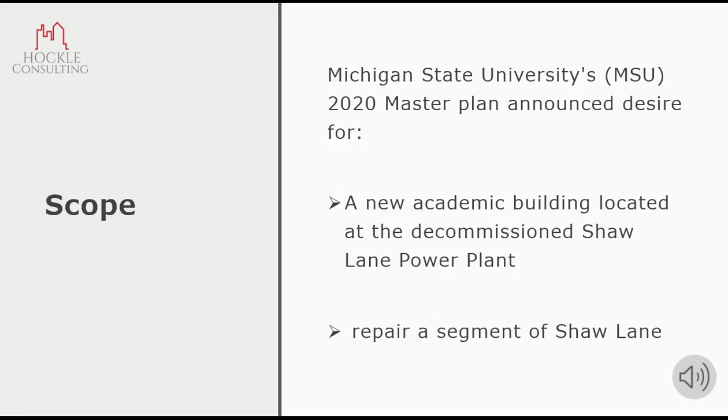This facility would ultimately become a central hub on campus, so coupled with the construction changes in the area, a segment of Shaw Lane would need to be repaired, and also the traffic would need to be rerouted differently in that area.

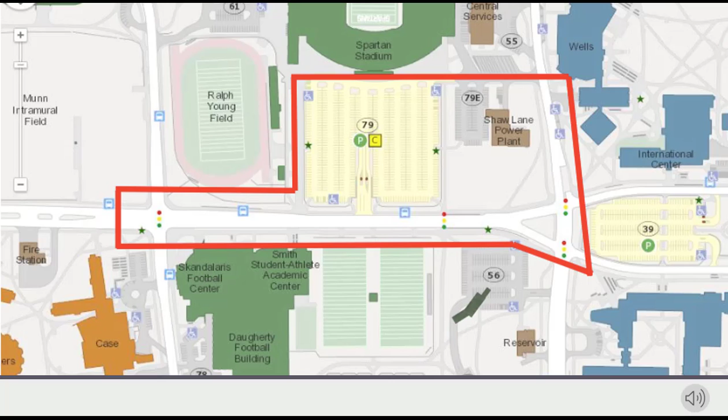Here we can see an aerial view of the proposed site area. The segment that is going to be repaired is perpendicular to Chestnut Road and Red Cedar Road. In this segment of the map, we focus in on the decommissioned Shaw Lane Power Plant. This will be the location of the proposed STEM building.

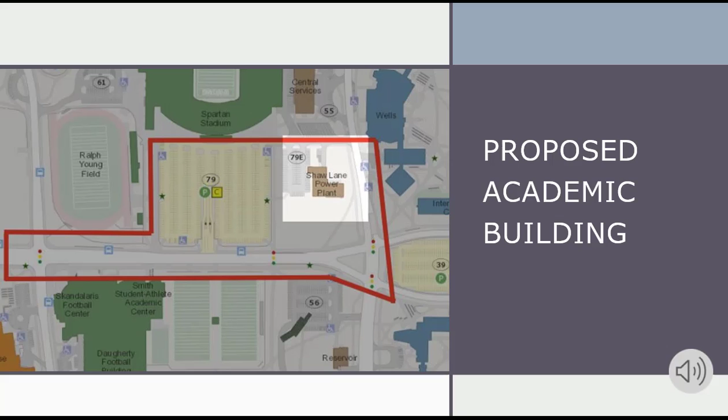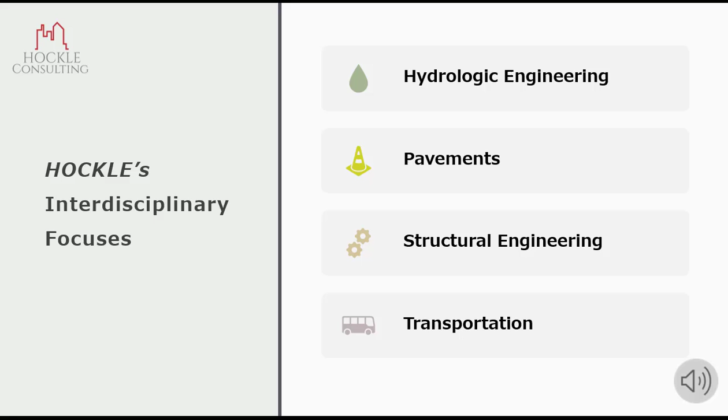At HOCKLE, we use several interdisciplinary fields to accomplish the scope of projects we take on. Each further addresses field-specific goals. We do not have an environmental engineer on our team, but all environmental information has been contracted to other firms that MSU has hired. Nonetheless, we still work to incorporate environmental sustainability in all aspects of our work.

Next, I would like to discuss some of the discipline-specific areas we focused on. Our objective in the hydrology area was to create a stormwater management system that could accommodate the new academic STEM building. Adjacent to the site area, there's also the Red Cedar River, so we wanted to minimize the impacts to that concerning the effluent leaving the piping networks. We also wanted to determine the most cost-effective way to do this and abide by Ingham County Drain Commissioner regulations.

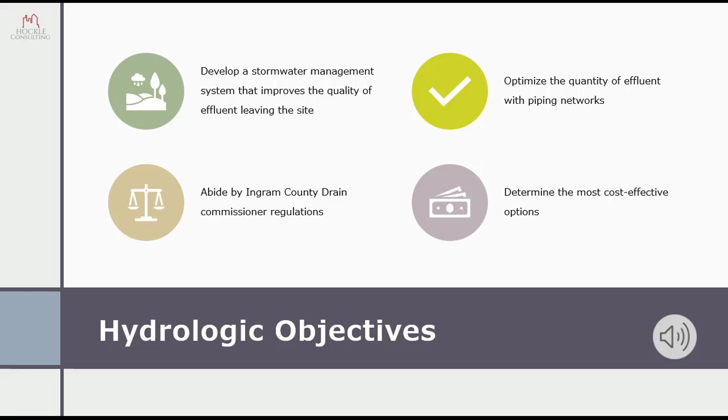In order to combat adverse effects to the Red Cedar River, the HOCKLE team designed their stormwater management system to actually decrease the flow rate into the river. We also implemented several other strategies to help improve water quality of the runoff entering the stormwater management system, which we will discuss later.

Concerning the structural objectives of this project, we needed to take into consideration the different types of loads that the building would encounter. This could be live loads from the increase in students and faculty due to the different resources and opportunities the new building will offer, dead loads from fixed objects like machinery and lab equipment, different loads from different types of rooms, and also weather loads like snow and wind.

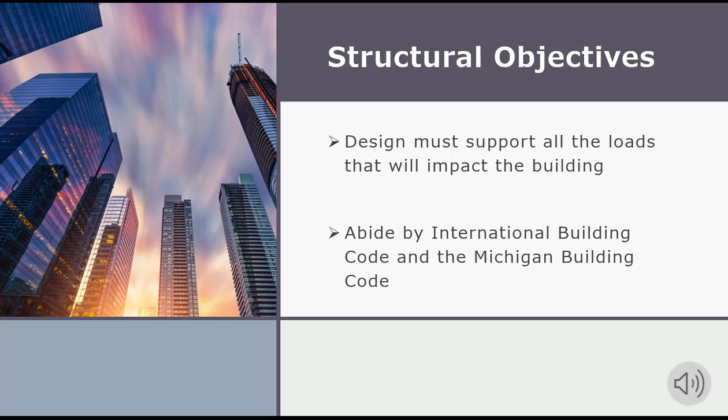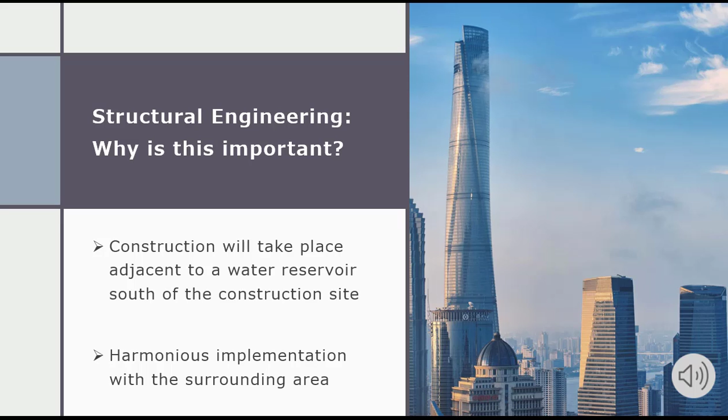The development of the academic building has many interdisciplinary considerations with hydrology due to the Red Cedar River water reservoir. So with that, there are economic considerations, safety, sustainability, and environmental consciousness to make sure that the building is harmonious with the surrounding area.

Our transportation objectives involve being able to provide a reasonable level of service on Shaw Lane. We also wanted to maintain parking accessibility. Because North Shaw Lane is going to be completely closed and only accessible to pedestrians, all of the traffic will be rerouted through South Shaw Lane.

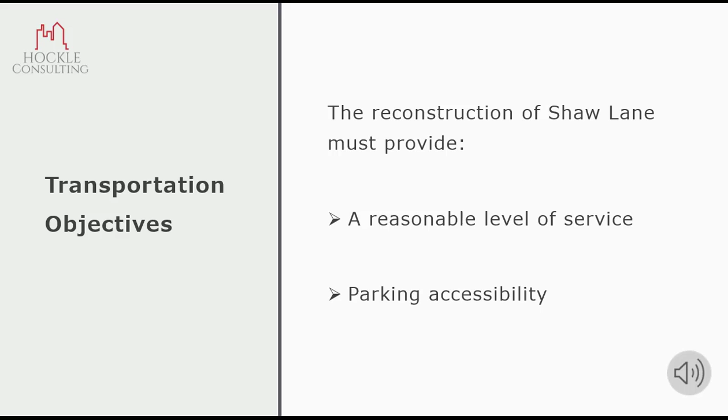Level of service is based on a grading scale of A through F, and they have different speed designations based on the type of road. Examples include freeways and one-way streets. These transportation considerations are important because the current design only accounts for traffic for a certain level of service that may not accommodate future activity.

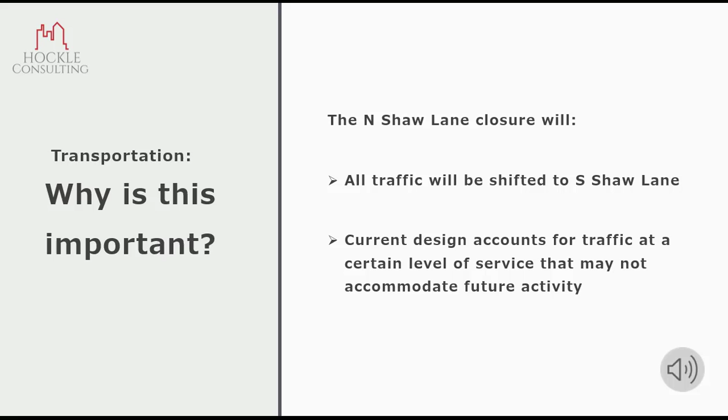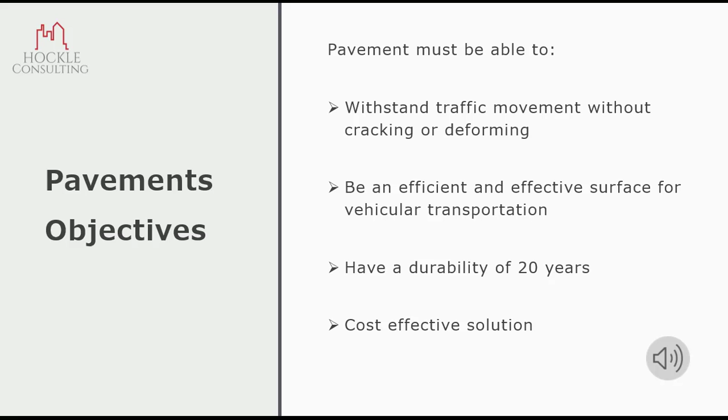Our pavement objectives have many interdisciplinary considerations with transportation engineering. First, we want our pavement to be able to withstand traffic movement without deforming or cracking. Also, by Michigan Department of Transportation standards, it must have a durability of at least 20 years. We also want our alternative to be cost effective.

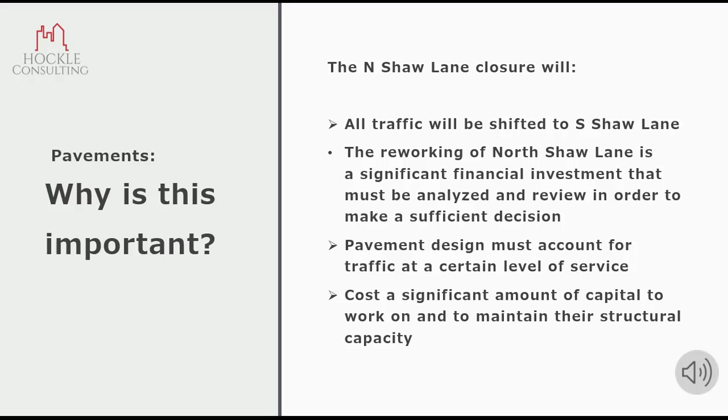Our pavement considerations are important for many of the same reasons as our transportation engineering considerations. Regardless, pavement must be able to accommodate future activity. The reworking of North Shaw Lane is a significant financial investment for the university, and the pavement design must account for that certain level of service that will be experienced.

Moving forward, we will now hear from each of our consultants to describe the design process of each discipline. Hello, my name is Evan Offerly, and I am the lead hydrology engineer here at HOCKLE.

The new proposed academic building on Shaw Lane will require an entirely new stormwater management system that not only manages and reduces the amount of runoff from the project site, but also increases the water quality. The solutions to these problems involve the installation of a green roof on the new building, the creation of 6 new rain gardens, and the construction of a new underground storage tank.

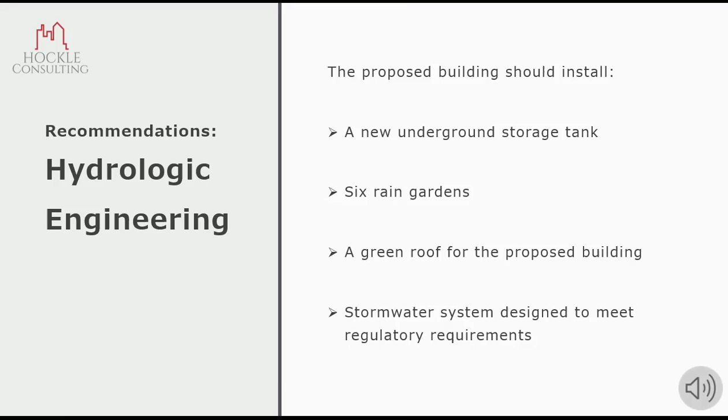The implementation of these technologies will not only help meet, but they will help exceed laws and regulations set forth by the Ingham County Drain Commissioner. These regulations involve limiting the amount of runoff leaving the project site to 0.15 CFS per acre. This equates to roughly about 2.3 CFS for the entire project site.

The Commissioner also requires that a detention tank must be able to accommodate a 100-year, 24-hour storm while still meeting the maximum 0.15 CFS per acre of runoff constraint. To account for the instance where there might be consecutive storm events, the system must also be able to drain itself within 24 to 48 hours.

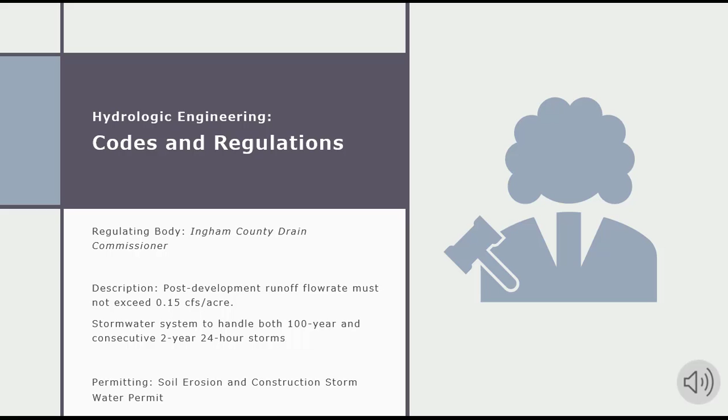After talking with the structural engineer Alex, we decided to implement a green roof. The green roof would act as a retainer of water that would slowly release it, ultimately increasing water quality and decreasing runoff. This green roof is designed to be 300 square feet in size and 3 inches thick. The building structure was designed to be able to support both the live and dead loads of this design.

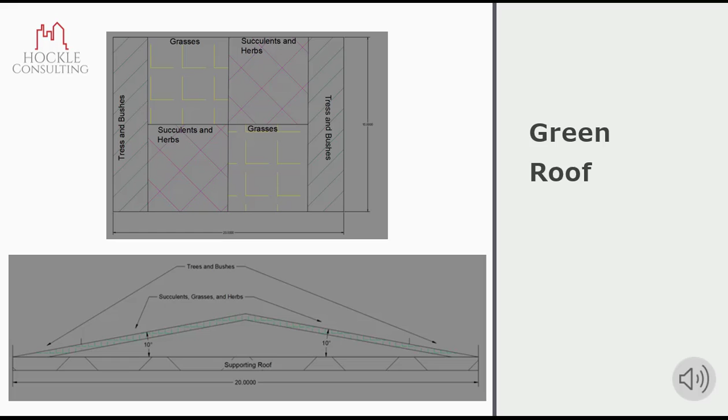These gardens are strategically placed in areas such as the parking lot that have high runoff coefficients and are positioned over inlets to maximize their effectiveness. Having these gardens located in the parking lot will also increase pavement longevity by providing natural coverage.

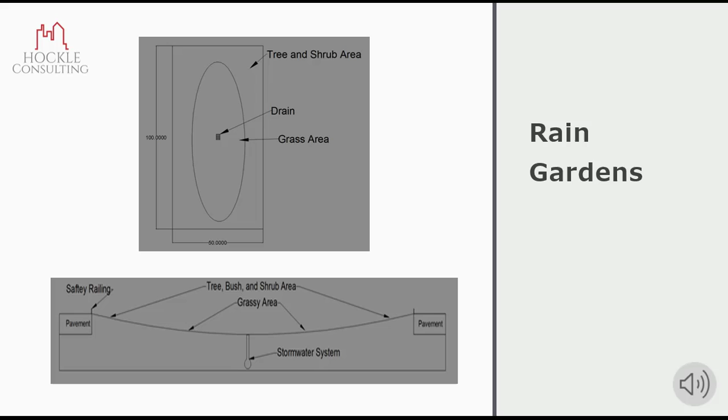Due to surface level space constraints, an underground detention tank was chosen as opposed to an above-ground detention basin. This tank is designed to keep the outflow to the existing stormwater system below 2.3 CFS and be able to manage a 100-year 24-hour storm, as well as drain within 48 hours during a 2-year 24-hour storm.

This underground tank can be located below pavement, therefore the placement of this vault can be adjusted to project needs. The preferred placement would be in an area easily accessible by trucks to allow for easier maintenance and installation. The outflow of the storage tank is designed so that the tank will be able to retain the first half-inch of rainfall, as well as accommodate the tie-in to the existing system.

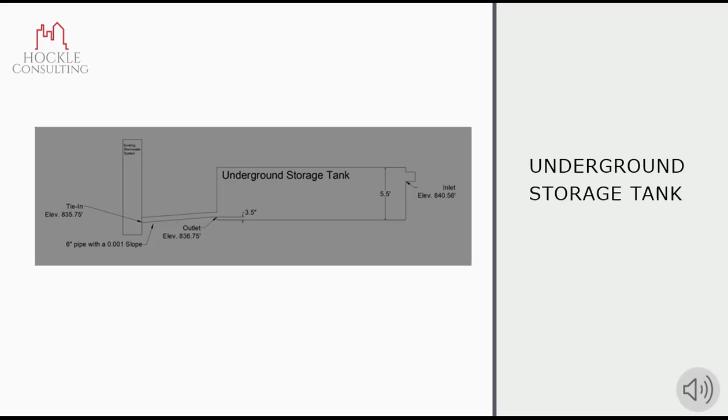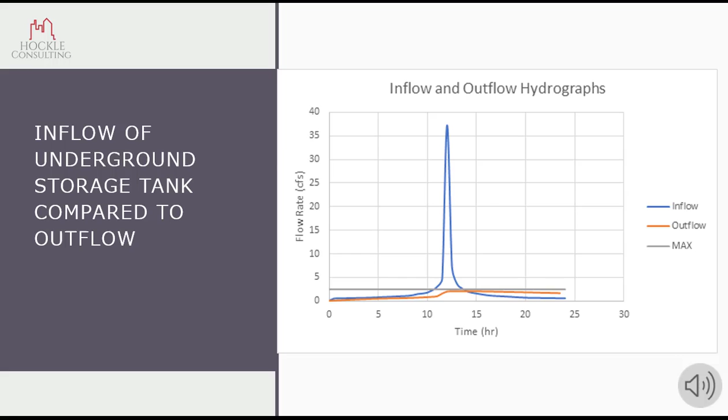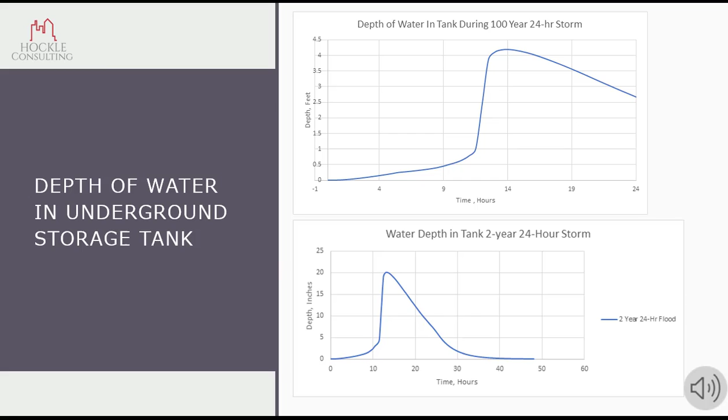The design was an iterative process consisting of adjusting pipe slopes and sizes to accommodate the tie-in, storage tank height, and velocity requirements at the same time as remaining below the frost level while still minimizing excavation and pipe length to limit project costs.

The storage tank design required adjusting the tank area, outlet area, and runoff coefficients of the catchments to keep the outflow into the existing stormwater system below 2.3 CFS at the same time as being able to store the first flush and 100-year storm's peak depth, as well as meeting size and elevation requirements for the tie-in. The tank was also required to eliminate its contents from a 2-year 24-hour event within 24 to 48 hours in case of concurrent large storm events.

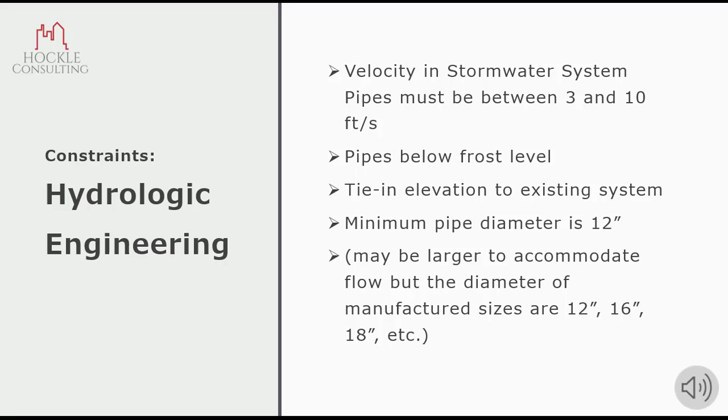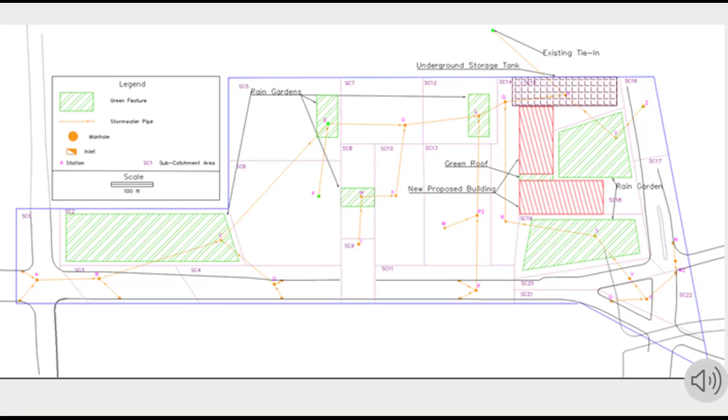The final cost estimates for the installation, excavation, materials, operation and maintenance, inspection, grading, and engineering design of this necessary stormwater management system is roughly $2,052,000.

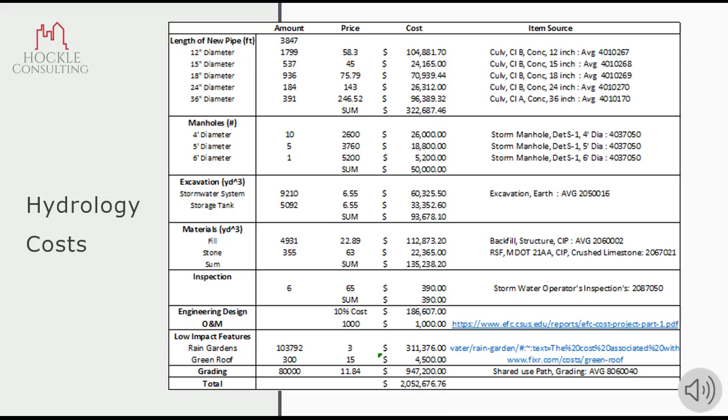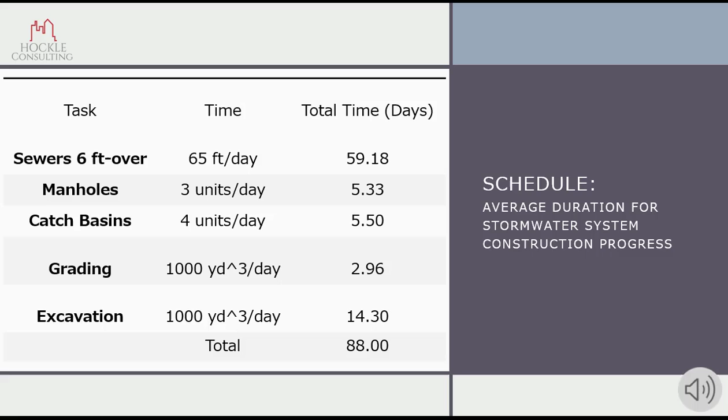Hello, my name is Alex Kipros and I was in charge of the structural engineering part of this project. The role of the structural engineering portion was the development of architectural and structural drawings leading to the construction of a new STEM educational facility.

These drawings were developed according to the restraints detailed by the lead architect in conjunction with the governing codes and regulations. These drawings and an understanding of the loads and governing load combinations led to the development of member sizes that allowed for a cost estimation of the total building.

The aforementioned restraints put out by the lead architect and MSU itself require the HOCKLE structural design team to put together drawings with adherence to a certain quantity and square footage of various rooms that will lead to an ultimate utilization of 75% of the building's entire space.

This 4-story building cannot exceed 65 feet in above ground height, nor can it be constructed utilizing wood as its primary supporting material. In addition to this, the new facility must be designed utilizing the footprint laid out by the lead architect.

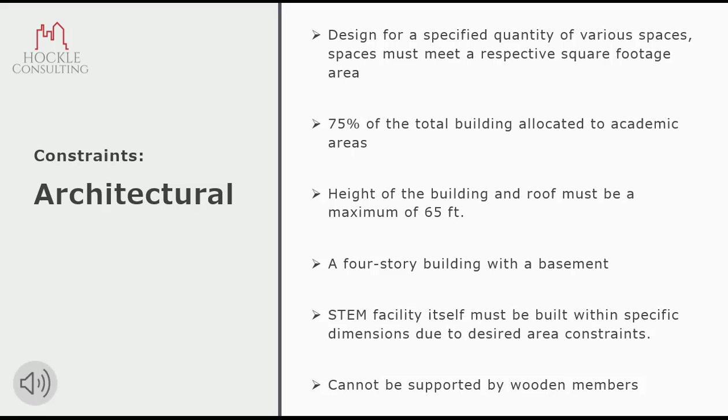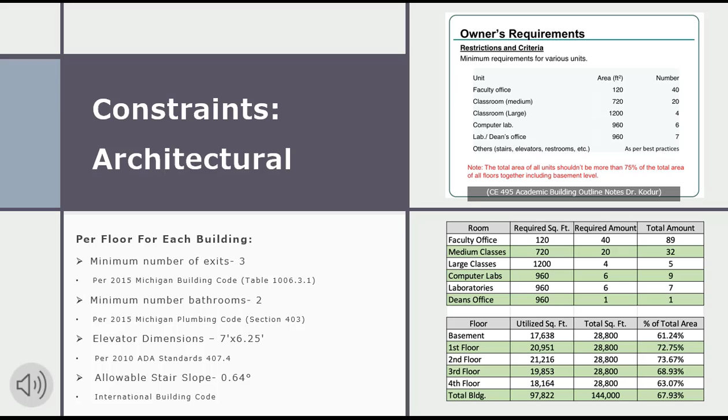The next handful of slides depict the architectural drawings developed by the HOCKLE design team. As the team developed these drawings, they had an understanding of the many students and faculty that would be going through this building and therefore streamlined the first and second floor to allow quick movement.

However, the team wanted to emphasize collaboration between students and faculty, which you can see through the use of unwalled study areas, especially on the 3rd and 4th floor. The basement was primarily designated for technicians and storage.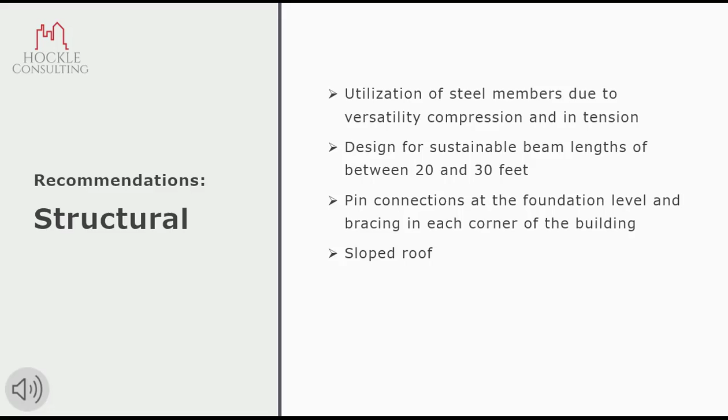The steel frame was determined understanding the footprint's dimensions laid out by the lead architect and by keeping a sustainable range of 20 to 30 feet in mind. Multiple viewpoints of the steel framing are shown in the following slides.

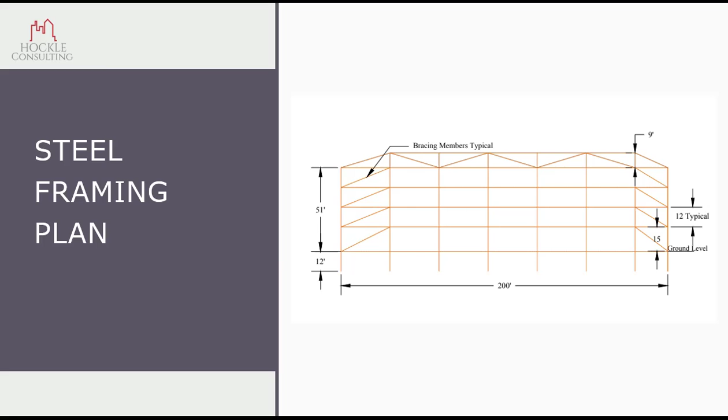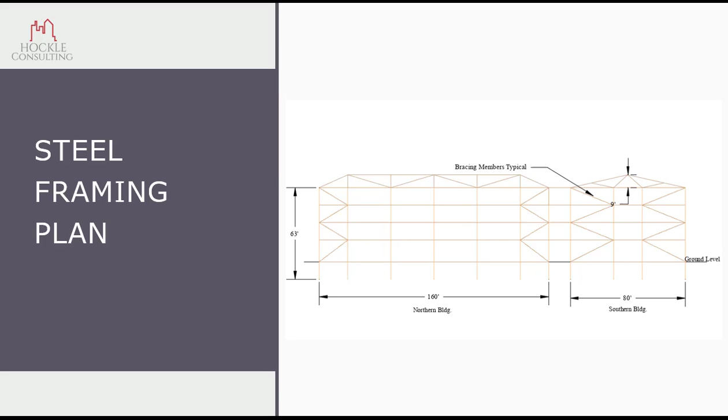Utilizing ASCE 7, the team was able to fully determine the loads that will be acting on this structure. The team decided to apply these loads through the LRFD design combinations, which will eventually allow for objective calculations to determine appropriate member sizes, as opposed to ASD specifications.

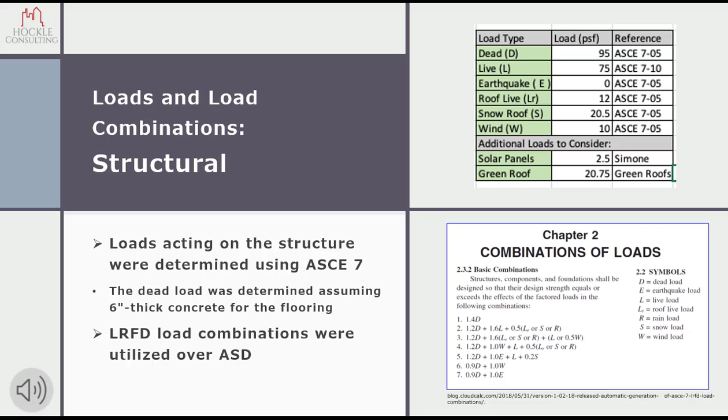Once the loads and load combinations were determined, they were appropriately applied to a 3D model of the structure within the SAP 2000 software. Due to the symmetry between buildings, only the analysis of the southernmost building was necessary. The SAP software took the applied loads with the load combinations and calculated the shear forces, axial forces, and bending moment for each member according to each load combination.

The team determined that the structure would receive the most load for the second load combination. The team then isolated 4 frames, 2 interior and exterior frames, which are also separated by width and length, to understand the members with the maximum forces for different criteria.

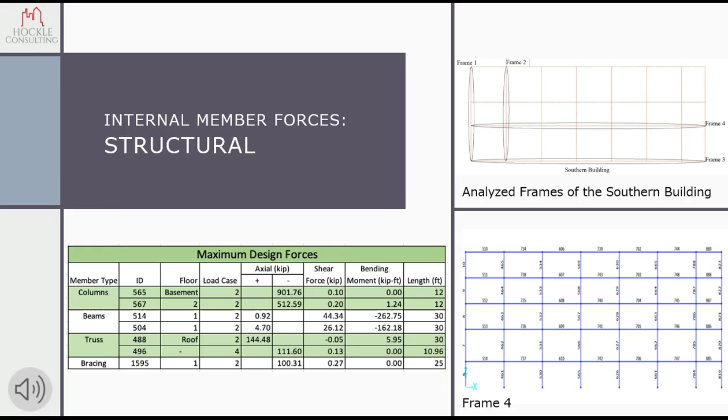The design and sizing of the previously mentioned members was then used to understand the member sizes for the entire structure. As shown in the above table, the axial loads applied upon column 565, which is the ultimately loaded basement column, require the use of a W14x109 member, as specified by the LRFD design specifications. This column size was then used for all columns in the basement and first floor of the structure.

Similarly, column 567 had the ultimate axial load for columns on the second floor. Therefore, all columns on the second, third, and fourth floor will use W12x45 as their member sizes. The same process was used for the remaining members and the entire structure, by which beams were differentiated by interior and exterior, trusses were specified by tension and compression, and all bracing members were the same.

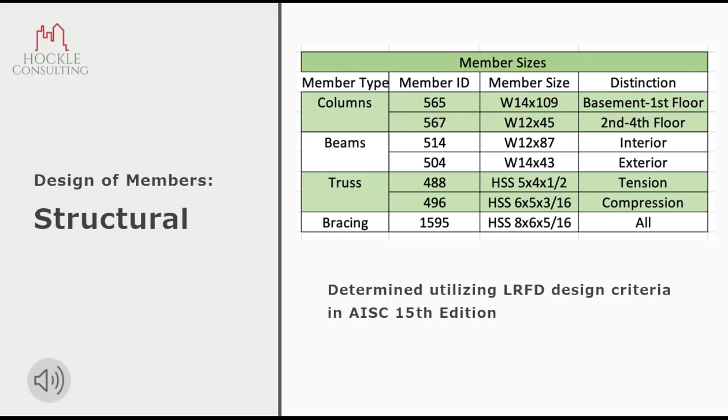As mentioned earlier, the LRFD design specification allows for objective means to determine the safety of members as opposed to relying on subjective experience. This design process usually gives multiple member sizes that can be utilized for design loads. However, the team consistently tried to choose the member size with the lowest nominal weight, causing a reduction in overall cost. Solar panels were added on the southern building and the south-facing side of the roof, which optimizes sunlight exposure in winter and summer months.

The team also added a green roof on top of the walkway between buildings and decided to fill out a LEED rating checklist. The items that the team checked off are items that we believe MSU would have no trouble in implementing and allow for a gold LEED rating.

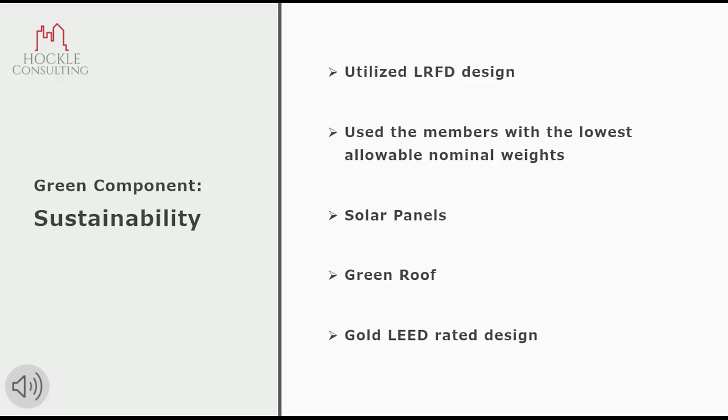As you can see, with the given recommendations from the HOCKLE design team, the new STEM educational facility has the possibility of having a total of 65 points without adding much of an upfront cost. These 65 points in turn will allow for a gold LEED rating. The building already receives 5 points for renewable energy production and carbon offset. Some simply implemented items that the team checked off were indoor water use reduction, water metering, indoor air quality management, and thermal comfort.

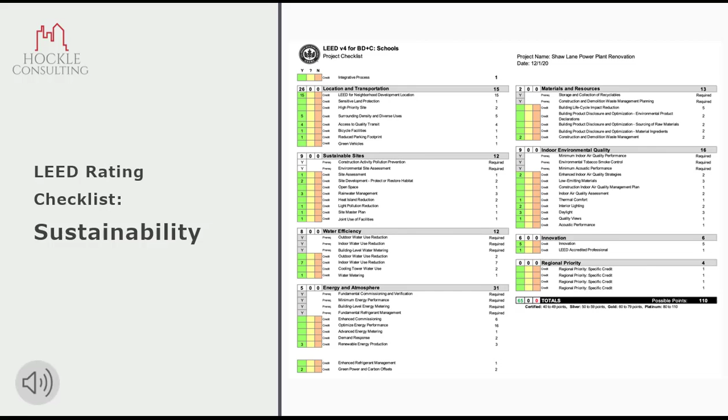The total cost for the entire structure is $9,053,977.83. The cost was determined by adding all the variables that you see in the table together, in which the total cost of steel was determined by multiplying the total weight of steel needed for the structure by $4 per pound of steel. The subtotal of steel was compiled, and then 20% was added for the erection and fabrication costs, and an additional 10% was added for the material necessary for connections.

The total cost of concrete was understood by first multiplying the total square footage of the concrete slabs for each floor by their 6-inch thickness, then by their unit weight. This total volume of concrete was then multiplied by its unit price of $145 per cubic yard to get its subtotal price. The subtotal price then added 20% for fluff factor and 20% for labor to get a total price. The design fee was determined based on the work done by the structural team per hour, and the engineering fee was based on the sub-cost for the entire structure.

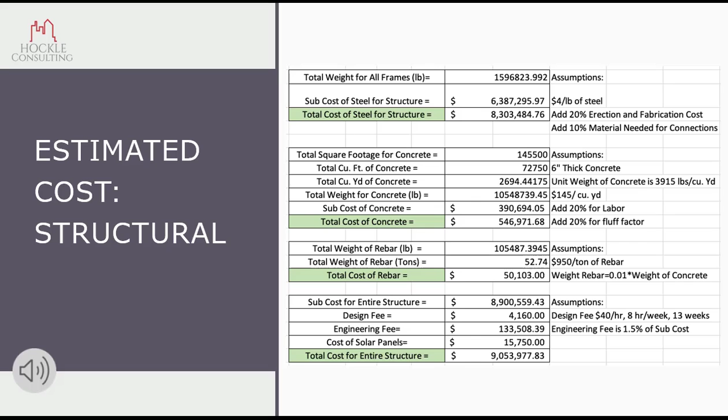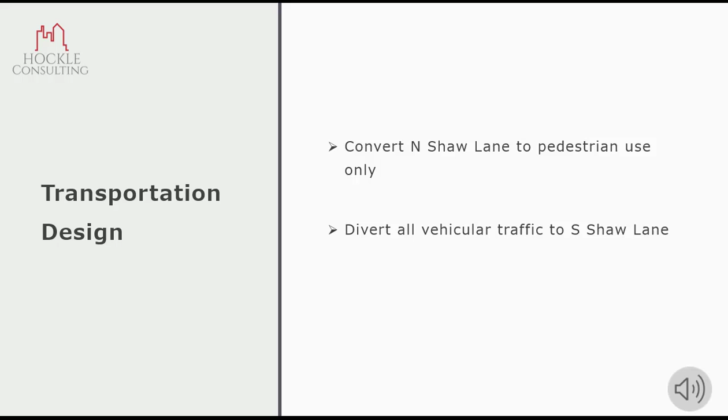Hi, I'm Josh Cole, and I'll be discussing the transportation portion of this presentation. The overall goals for the transportation portion were to convert North Shaw Lane to pedestrian use only, and then divert all vehicular traffic to South Shaw Lane, all while keeping in mind sustainable practices. The regulations followed for this part of the project were derived from the American Association of State Highway and Transportation Officials. Basically, the main regulations we were following were regarding lane width and turning radius for city buses.

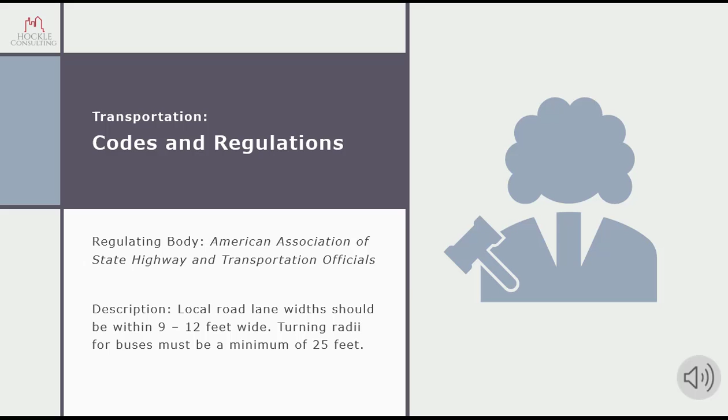So the main goals for this project were to maintain a high level of service for the intersections, account for the growth over the next 20 years and increase in traffic, and to also keep in mind sustainable practices for this design.

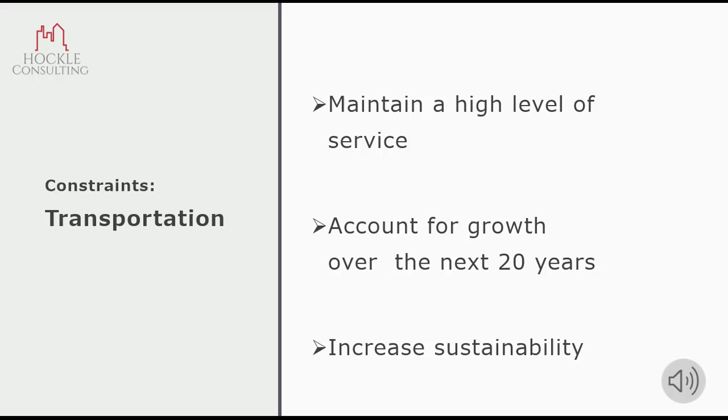So our current recommendation is to remove the bike lane from South Shaw Lane and then bump the roadway out to the north one lane, and then convert North Shaw Lane entirely to pedestrian and bicycle traffic only. There'll be some minor modifications made to the north side of the Red Cedar intersection of North Shaw, and then the intersection of North Shaw and Red Cedar will be converted to a pedestrian crossing.

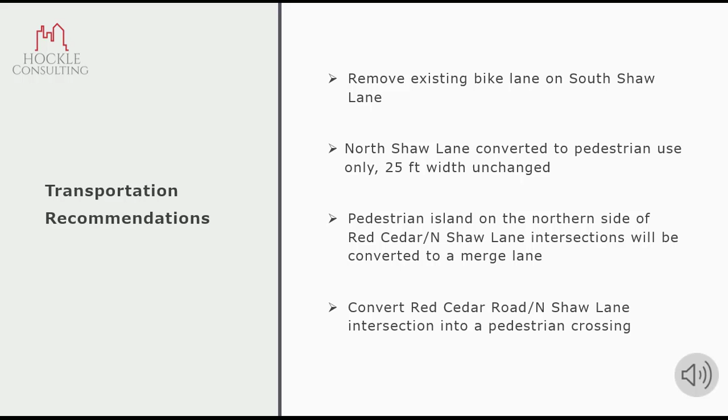Here's the original site. The scope of our project extends east to just past Lot 40, and then to the west, just after West Shaw splits into North and South Shaw Lane, and then just north and south of each of the respective intersections.

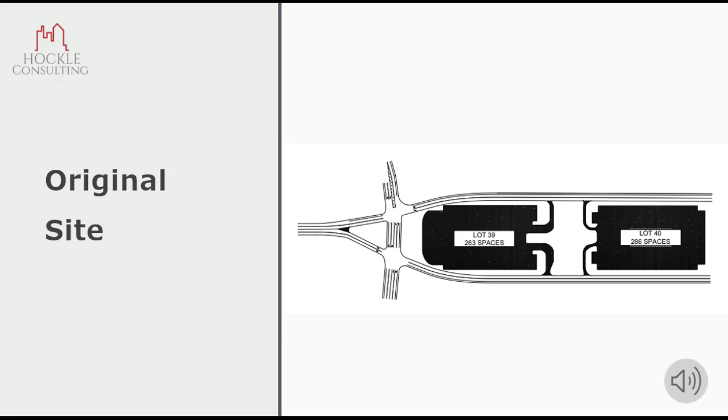So here's our proposed site. Basically, it does everything that we were talking about. Pedestrians are kept to North Shaw, and then all the traffic is diverted to South Shaw. I'll be breaking this up into 4 different parts to make it a little easier to digest.

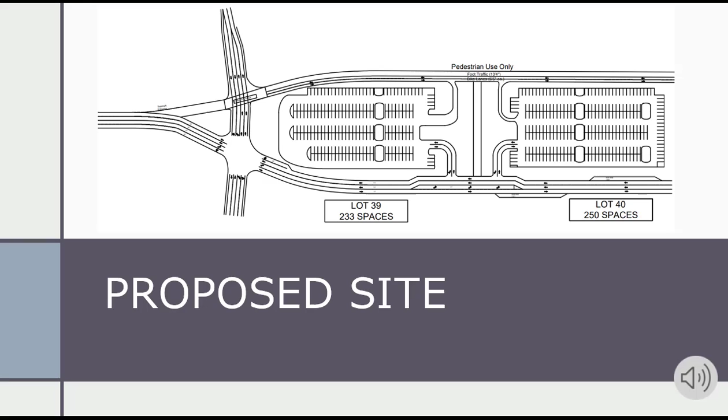So here's the North Shaw portion of the design. In the top figure, it's the North Shaw Lane and Red Cedar Road intersection. It's designed for pedestrians to have their own phase to allow them all to cross safely, and then you just have the through traffic on Red Cedar. There's no right or left turns.

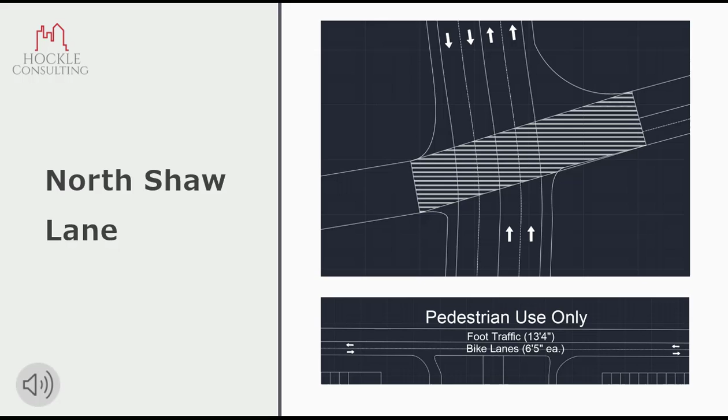The bottom figure lays out the design for the length of the road, and the idea is to keep it the exact same width, so there won't be really any new pavement going in, but it will be redistributed. So we'll have 2 bike lanes at 6 foot 5 inches each, and then a single lane for foot traffic that's going to be 13 feet 4 inches. And then you have pedestrian and bicycle entrances and exits into lot 39 and 40 there.

To the west side of the site, we have the area where we're going to be redirecting all traffic from West Shaw down onto South Shaw. So you can see kind of where there's that sidewalk entrance. That's a pre-existing sidewalk entrance that will take people off of North Shaw and onto the sidewalk. And then there's going to be a concrete barrier that will protect pedestrians and bicycle traffic from the vehicle traffic on West Shaw. And these lanes are all going to be their pre-existing width, which is 10 feet.

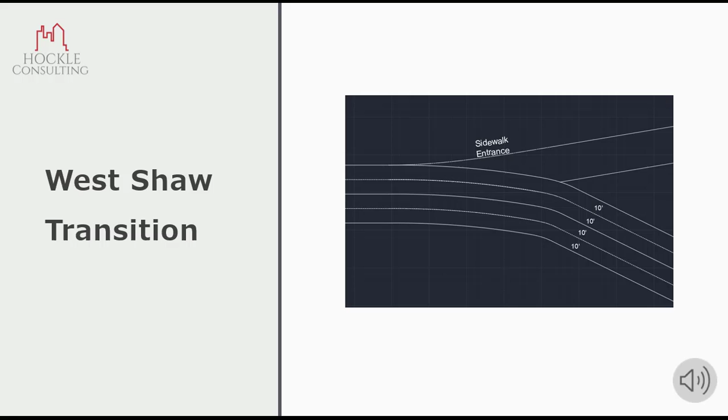Here's the figures for South Shaw Lane. The top figure is the South Shaw Lane Red Cedar Road intersection. The Red Cedar Road portion hasn't really changed much. The only difference is now the traffic has the ability to turn left or right at this intersection.

However, the South Shaw and West Shaw Road portion has changed a fair amount. Now the West Shaw portion will be 4 lanes, and the South Shaw portion will be 3 lanes with 1 storage lane for right turn or through movements. This was designed by basically inputting all projected traffic volume data into traffic simulation software and then figuring out which intersection is going to provide us with the highest level of service without increasing costs too much.

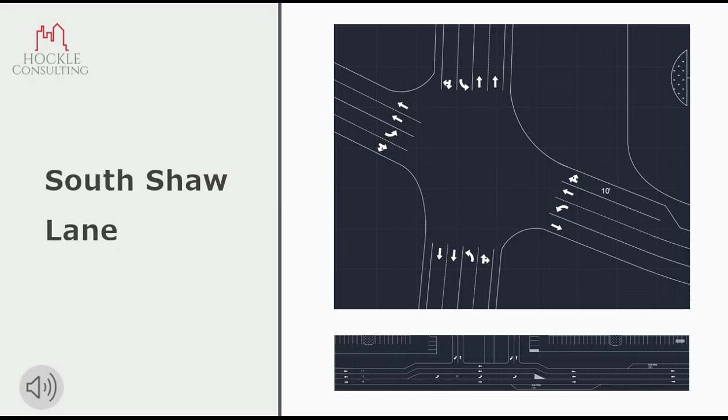And the bottom figure shows the entire length of the road. It'll be a 3-lane road where the northern 2 lanes are going to be westbound, and then the southernmost lane will be eastbound. Once you get near the parking lots, we're going to have a left turn lane in order to allow through traffic to proceed through uninterrupted, and traffic going into the parking lots will be able to turn safely. Additionally, we'll be adding a bus stop to the south side of Lot 40.

So here are the modifications made to lots 39 and 40. Lot 39 is the top figure. From the original site, we're losing around 40 parking spaces. On both lots, the entrance and exits are modified. Exit is a right turn only in order to increase safety by decreasing the amount of turns across oncoming traffic.

In Lot 40, we're losing about 30 parking spaces, and all these lost spaces are because of the expansion of South Shaw Lane about 11 feet north. So we had to cut some of the spaces out in order to create a buffer between the parking lot and the road. And the hope is that the decrease in parking spots will encourage people to either ride the bus or walk or ride their bikes, which will improve sustainability.

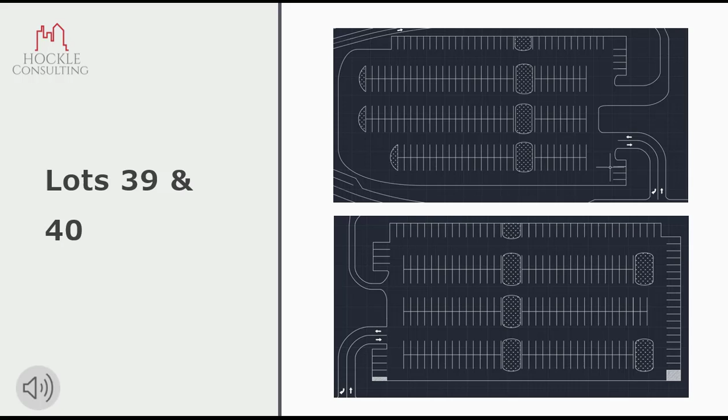So the overall cost for this portion of the project is going to run us to around 1.7, 1.8 million, and that was calculated using the MDOT weighted average item price report for 2019. Now, this includes only the materials. It doesn't include any of the labor or really anything beyond the price for the material, such as paints or signages or traffic signals. So that concludes the transportation design.

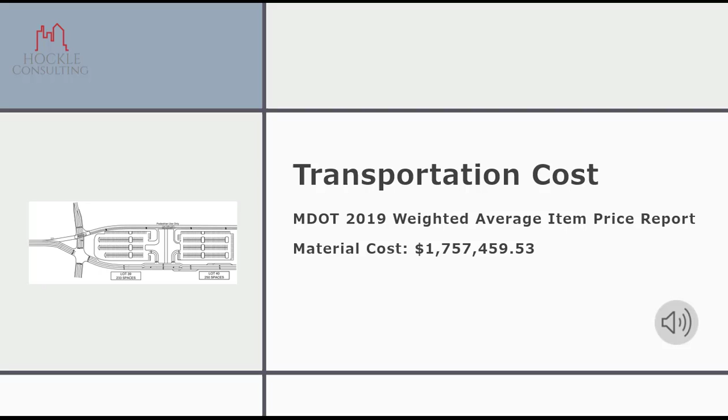The recommended pavement structure for North Shaw Lane is a mill and fill overlay flexible pavement, which is essentially shaving 2 inches off the original flexible pavement and then overlaying on top a fresh new 3 inches of hot mix asphalt. The 8-inch aggregate base is to remain there as well as the aggregate subbase of 12 inches.

The roads and sidewalks of North Shaw Lane are to remain 12 feet, and the parking lot and lanes around parking lots 39 and 40 are to become 10 feet for easier traffic flow. The bike lanes in this area are to remain 5 feet as well. The pavement grade is to be 0.5%.

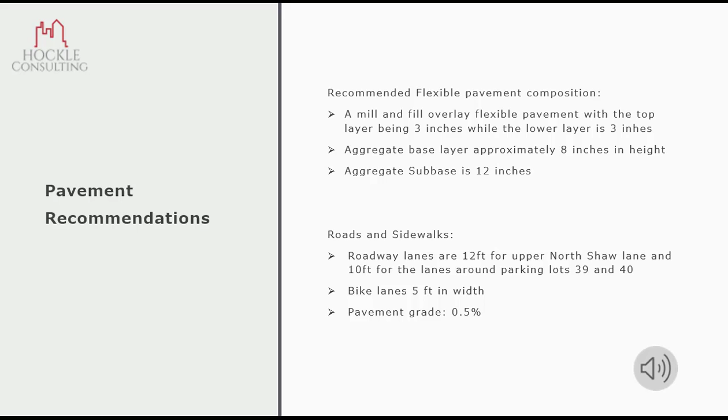The main body of government responsible for controlling pavement designs and roadways is the Michigan Department of Transportation. Typically, they decide what is and what isn't allowed at a state level for pavements. Usually a pavement has a design life of about 20 years, and anything lower than that is usually frowned upon due to the materials expended during that time. The material must also not have any unacceptable substances, i.e. no easily removed carcinogenic materials such as asbestos.

You also need specialized permits when working on roadway construction, such as a utility and private road construction permit, a right-of-way construction permit, or an individual application and permit. Usually these are all accessible through MDOT.

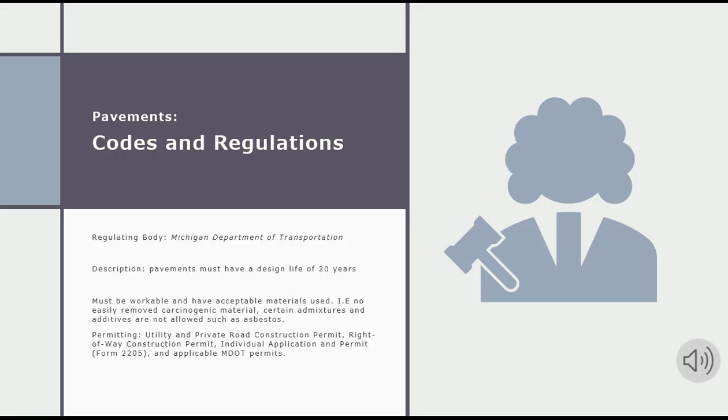The design of the pavement also coincides with several different constraints or factors. This is typically such as the width of the pavement, which is basically a given in a given area, either 10 feet or 15 feet, or if we are just redoing an already present lane, you cannot change the width without severe alterations to the surroundings.

Also, a constraint is the material used, which is either a flexible pavement, usually hot mix asphalt over an aggregate base, or a concrete road, which is basically highway style concrete slabs connected together using rebar and laid over a larger aggregate base. And also, of course, proximity to surrounding buildings and structures such as sidewalks, buildings, traffic lights, or utility areas.

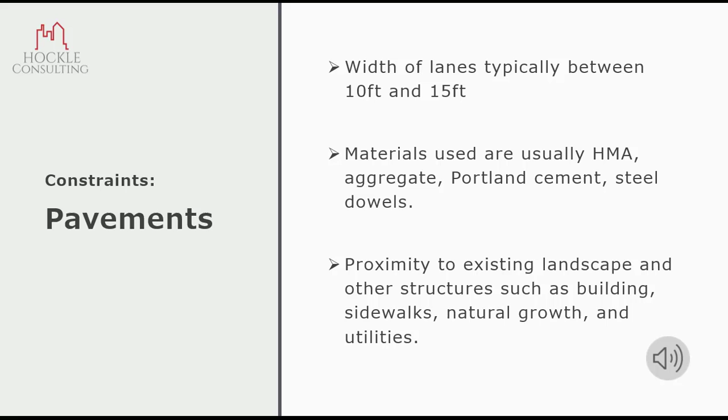In order to facilitate the designing of pavement structures, data must be gathered regarding the surroundings. This includes, but is not limited to, precipitation data: how much snowfall every year, how much rainfall, how frequently weather changes, how intense storms are. We also need to collect local climate data regarding the location of pavements in order to create a pavement that doesn't react violently with the weather, such as frost depth and heat waves, so the asphalt doesn't melt.

We also need to take several soil borings of the surroundings to see if the local subgrade soil is able to withstand vehicle weights moving over it, so as not to cause the pavement to sink beneath it. Federal and state guidelines also need to be reviewed in order to find the proper legality of pavement creation.

Traffic demand and volume also need to be cited to try to figure out how many ESALs, or equivalent single axle loads, are traveling over a given road every day. We also need to figure out its drainage requirements to allow water to flow downward and away from the pavement structure, so as to not cause significant damage.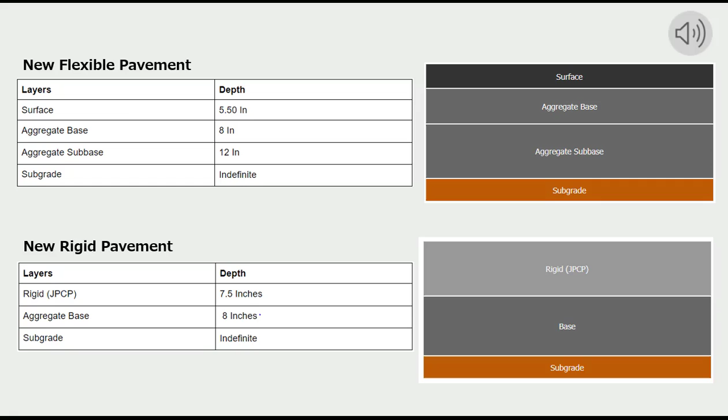These two designs here are the least material expensive because they are reusing the material already present within the pavement. Both these plans are to overlay the old existing pavement with a new layer of hot mix asphalt to cover over or suppress any apparent deficiencies or problems located within the pavement layer.

The first plan is to overlay the top pavement with a thick coat of HMA without modifying the existing pavement beneath it. The mill and fill flexible pavement plan is to shave approximately 2 inches off the existing hot mix asphalt layer to remove any cracks or deficiencies. Next, we would add a slightly smaller layer on top of the shaved layer in order to use less material while still maintaining a supportive structure. With this, the mill and fill flexible pavement is technically the more cost-effective method and is thus the correct answer material-wise.

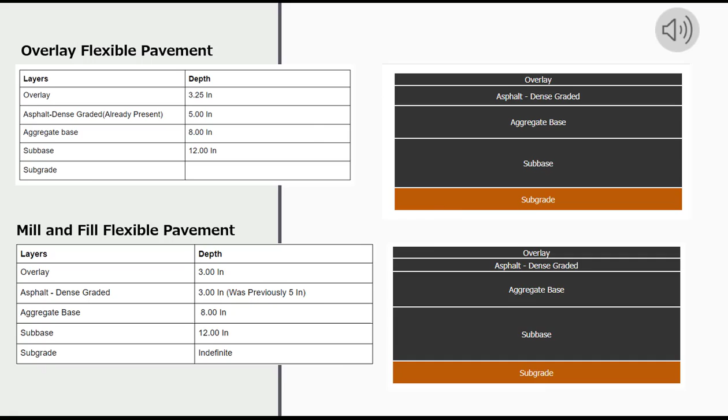With the LCCAs finally finished, a proper decision can be made regarding total cost analysis of the pavements. As you can see in this photo, alternatives 1 and 2 are mostly more costly than alternatives 3 and 4 since they're entirely new material, and we are basically ripping out the old one, installing a completely new road in. Alternatives 3 and 4, however, reuse older materials, so are kind of less costly.

Alternative 4 holds the lowest value for overall cost due to using the least amount of material, which is because instead of a full overlay, we're actually shaving a bit of the old asphalt away to make sure to still make use of it.

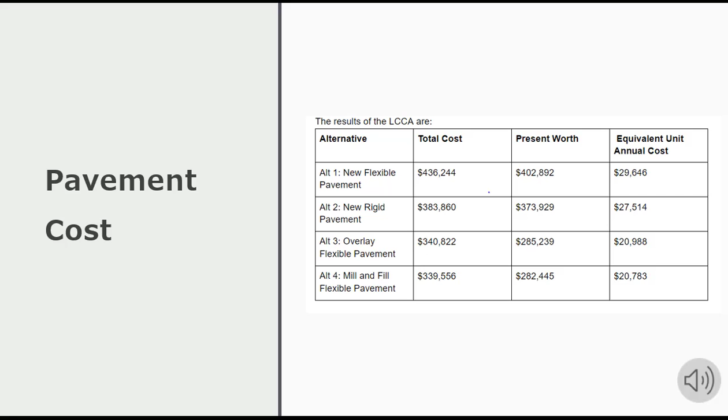Once we figured out the total material cost or capital cost of pavement design, we need to put it through a life cycle cost analysis. A life cycle cost analysis is essentially a method of analyzing the acquiring, owning, and disposing of a building structure or system, which is basically taking into account the initial cost combined with any other costs associated with that building, such as maintenance, labor hired, traffic control, future use costs, follow-up rehabilitation.

Also, noticeably, at the end of its life cycle, we get a small percentage of that money back by selling off the material as scrap, since we no longer are using that material. The main 3 outputs of a LCCA are the total cost, which is basically the overall cost of all the materials, all the labor, all the maintenance, and any other costs that might be associated with this structure.

Its present worth, which is essentially how much this road or structure is going to be worth after 20 years. And then there is an equivalent unit annual cost, which is essentially the yearly modified cost that you are currently paying out for it over the next set of years.

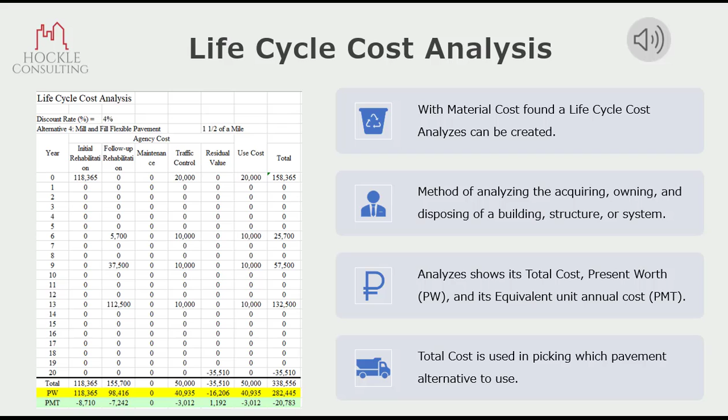The HOCKLE team has determined that the project will cost approximately $105 million. We can see the cost breakdown by discipline on this slide, with other costs taking up the majority of the fees. This is because we take into account soil erosion and sedimentation control, fees for permits. We'll also need traffic devices and traffic control while Shaw Lane is being reconstructed.

We'll need pavement cleanup and overall project cleanup and mobilization. We'll also need water treatment operating costs, in addition to asbestos remediation. There's significant asbestos in the Shaw Lane power plant that will need to be removed.

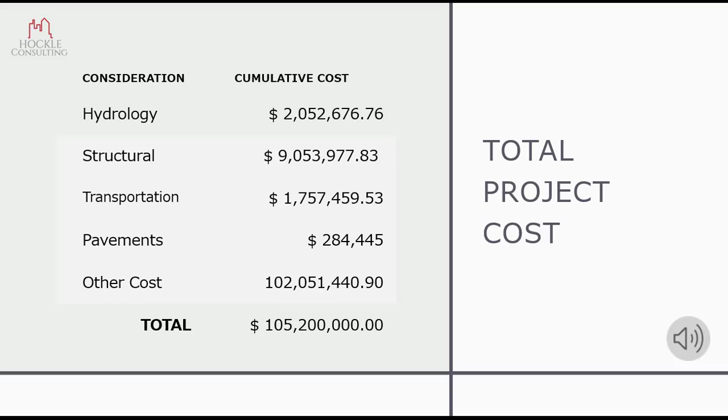Here we can see the project schedule. It takes place over approximately a year and a half with a 2 to 3 month buffer due to the impacts we predict due to the COVID-19 pandemic. In the first phase, we would like to internally demolish the Shaw Lane power plant and work on asbestos remediation. Next, during the spring, we would like to close off North Shaw Lane and begin the reconstructions of the lanes of South Shaw. We would also work on the expansion of parking lots.

In that following summer, during March to June 2021, we would continue roadway construction and begin construction of the stormwater management system. We would start from the west end because on the east end would be the academic building, and we need to excavate and lay the foundation for that before we start to incorporate the stormwater system. We would also start to lay the rain gardens and place the underground storage tank.

Following, and also occurring simultaneously in Phase D, we would open hole the area for the expansion of the academic building, lay the foundation, and establish the steel beams. In July and September of the same year, we would start to construct the external portions of the building, complete the stormwater system, and develop the green roof.

Later that fall, we would like to complete the road work and develop the internal components of the building, like room divisions, electrical, gas, and water distribution piping. Last, when we return from the holiday vacation, since we don't include any time working in December, we would like to complete anything that remains in the academic building as far as internal utilities.

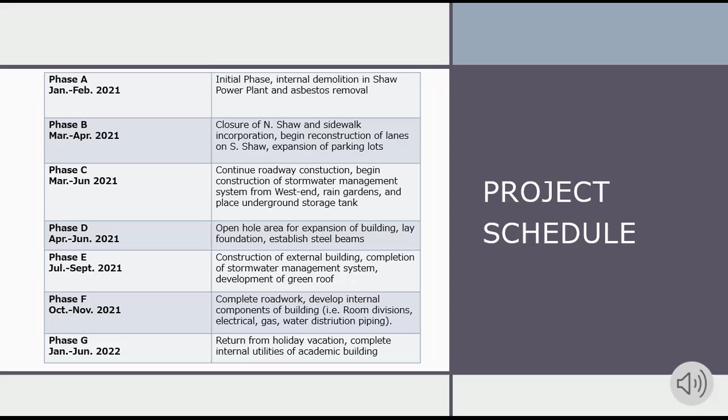The HOCKLE team recognizes that this project will have significant impacts on the MSU community. This will become one of the most highly trafficked areas on campus due to the increase of classroom space, and it will become a central hub for the campus community. It will definitely provide resources for students to engage in learning, professors opportunities to engage in more advanced research, and opportunities for the university to attract new talent.